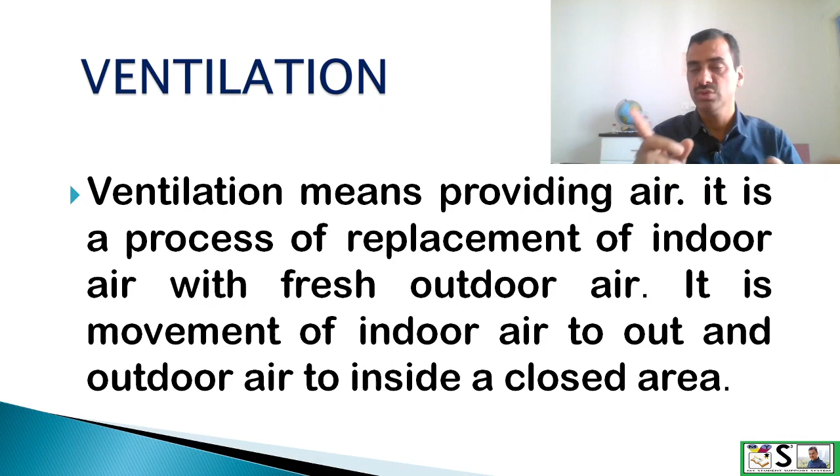What are the standards of ventilation? Normally, for ventilation standards, we use three methods. Number one, cubic space. Fresh air supply of 3000 cubic feet per person per hour is a good standard.

It is observed that if the amount of carbon dioxide due to respiration is not more than 2 parts per 10,000 parts of the air, the air of the room is considered fresh, and if it is more, then it will not be fresh and it needs to be ventilated.

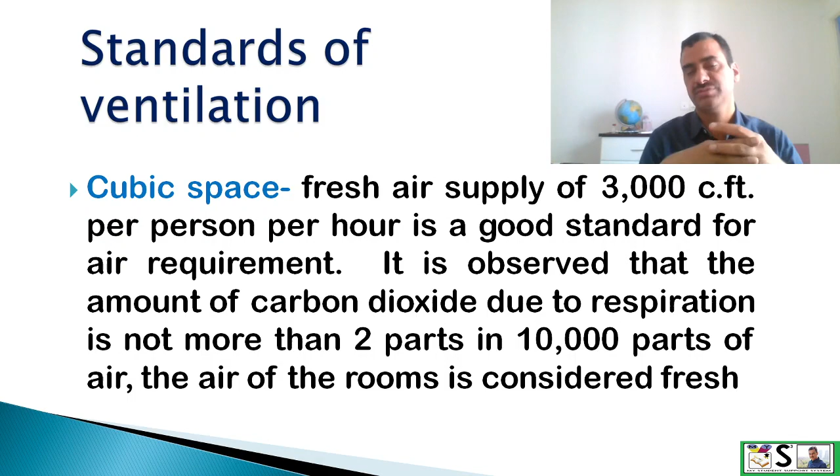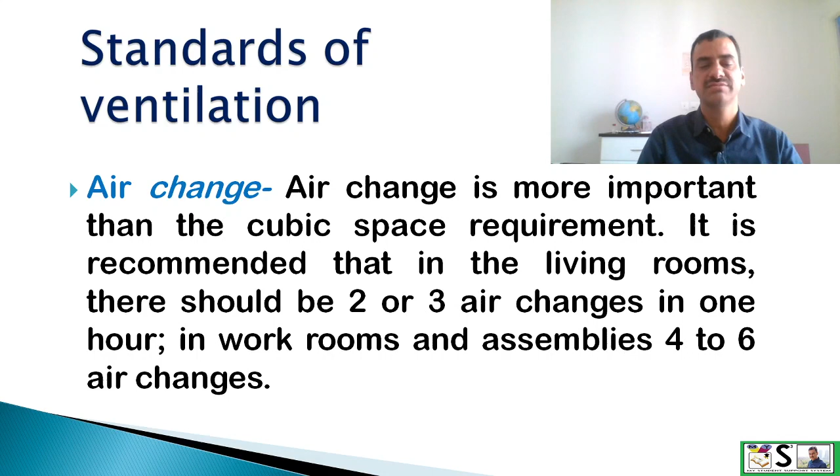Second standard is air change. Air change means to change the air. How often should the air be changed? Air change is more important than the cubic space requirement. It is recommended that in living rooms there should be 2 to 3 air changes in 1 hour. In workrooms or assemblies, 4 to 6 air changes per hour are required.

Third is floor space. Floor space per person is also a good standard and more important than the cubic space. Normally, in rooms, height over 12 feet is not considered. The optimum floor space requirement per person varies from 50 to 100 square feet.

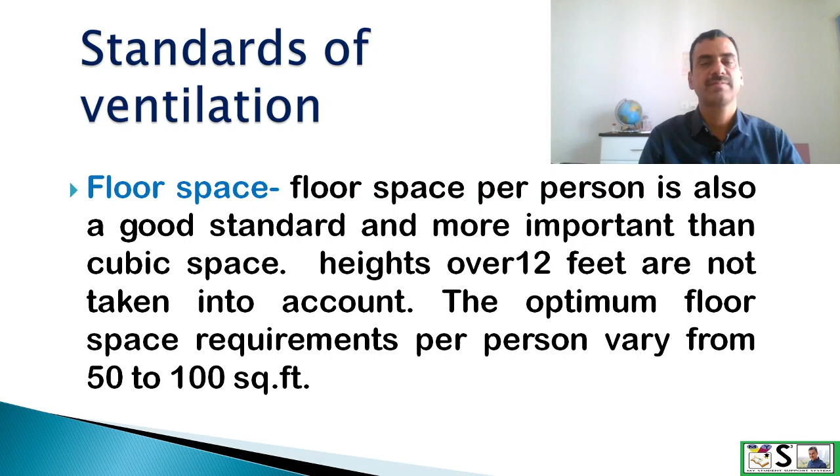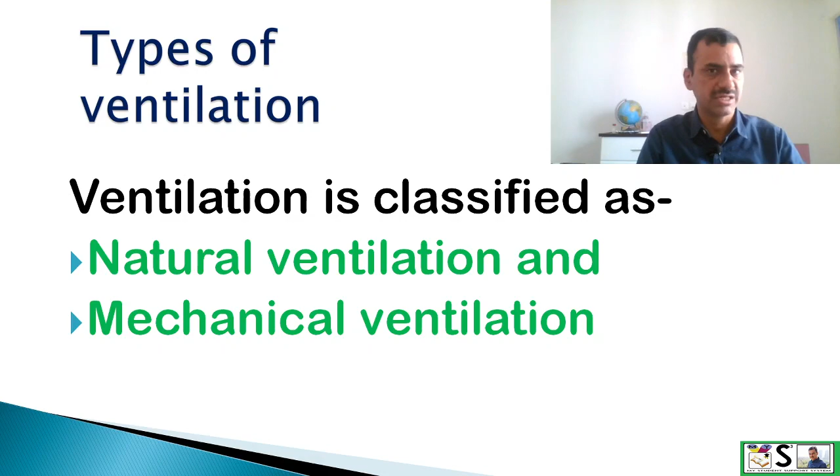Now, types of ventilation. There are two types of ventilation: natural ventilation and mechanical ventilation. Natural ventilation is the simplest system of ventilation in small houses, rooms, schools and offices. In this method, certain natural forces work for the ventilation.

There are three types of natural ventilation: wind, diffusion and temperature difference. First is wind. The wind has a natural force. When it blows or moves through the room, this process is called perflation.

Sometimes due to obstruction, it exerts a suction action at its tail. This is called aspiration. When doors and windows are facing each other, this process is called cross ventilation. It is the best system of natural ventilation.

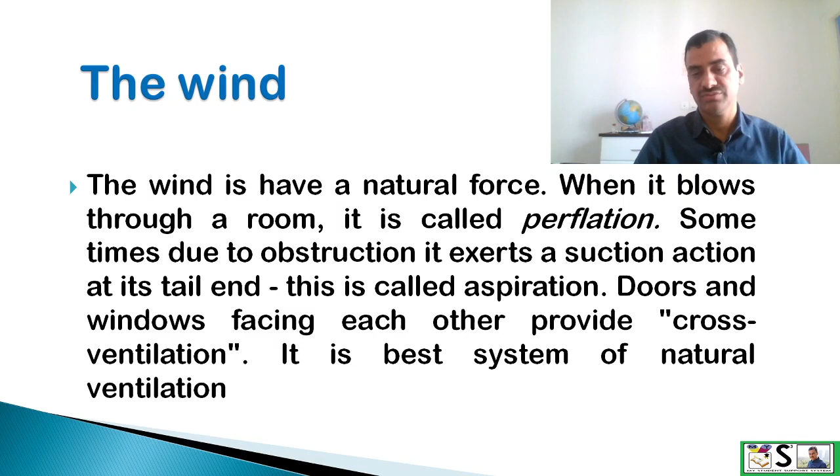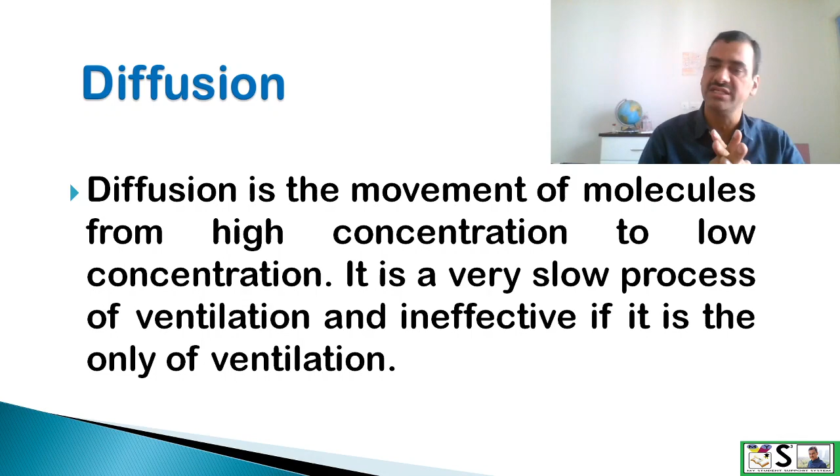Second is diffusion. Actually, diffusion is a very slow process of ventilation where the molecules of gases present in the air travel from high concentration to low concentration. And if it is the only method of ventilation in rooms or houses, then it is ineffective because it is very slow.

Third is temperature difference. Air flows from high density to low density. Hot air, which is low in density, escapes from the openings or ventilators provided in the room, and normally these are placed at a height near the roof.

The outside air, which is cooler and more dense, will enter the room through the doors and windows provided. So a natural cycle is created. This is also a good system of natural ventilation.

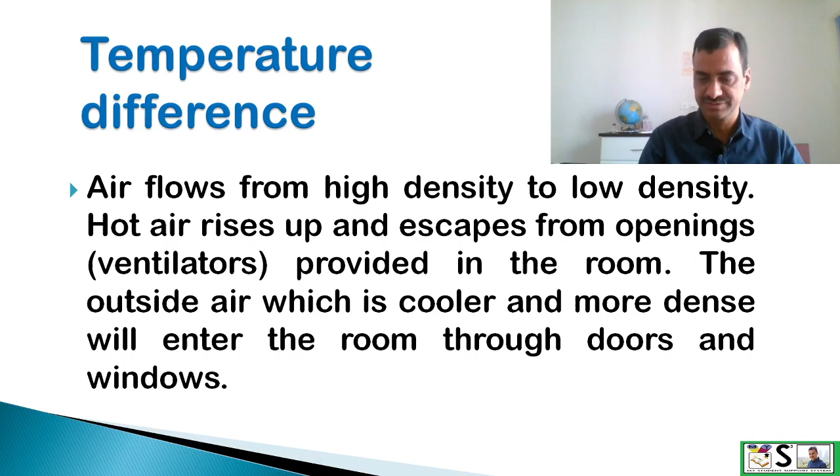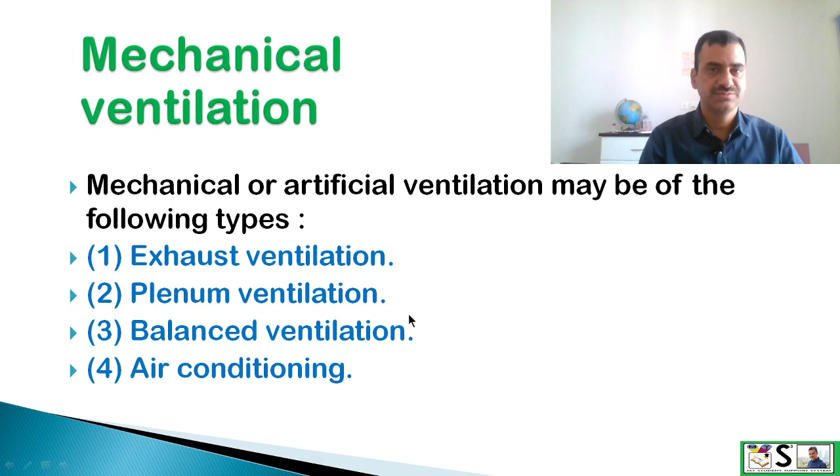Now we come to mechanical ventilation. Mechanical or artificial ventilation may be of four types: exhaust ventilation, plenum ventilation, balanced ventilation, and air conditioning.

Exhaust ventilation. In this system, air is extracted or exhausted to outside by electric exhaust fans. As the air is exhausted, a vacuum is created in the room, which results in fresh air entering the room through windows, doors, and other inlets.

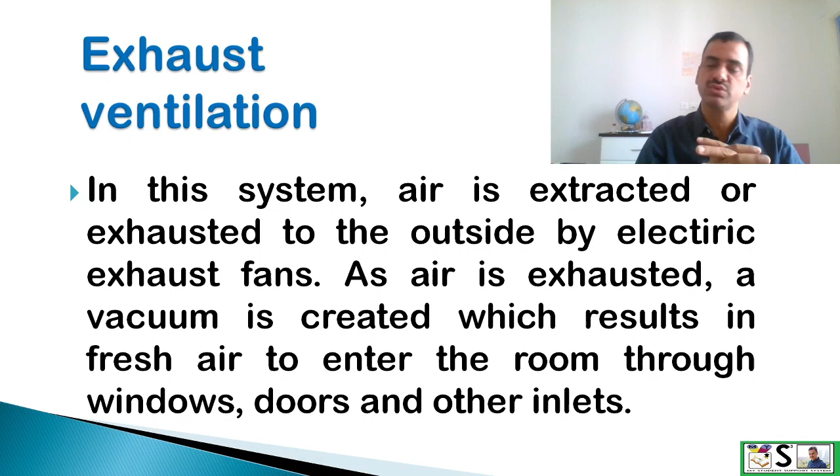This system is generally provided in large halls and auditoriums for the removal of vitiated air. The exhaust fans are fixed in the external walls, up near the roof, which facilitates removal of the upper layers of heated and light air.

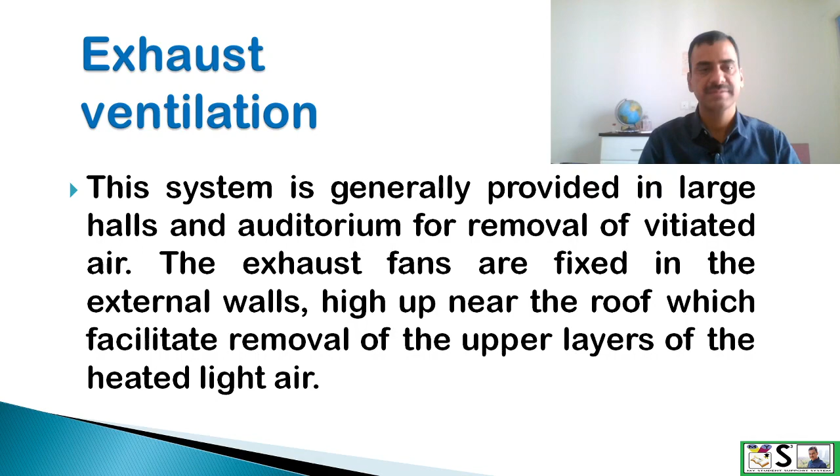Next is plenum ventilation. Plenum ventilation is opposite to the exhaust system. In this system, fresh air is blown into the room or hall by electric fans so as to create a positive pressure in the room, and due to this it displaces or removes the vitiated air through the outlets provided in the room or hall. Air is delivered through ducts at the desired points.

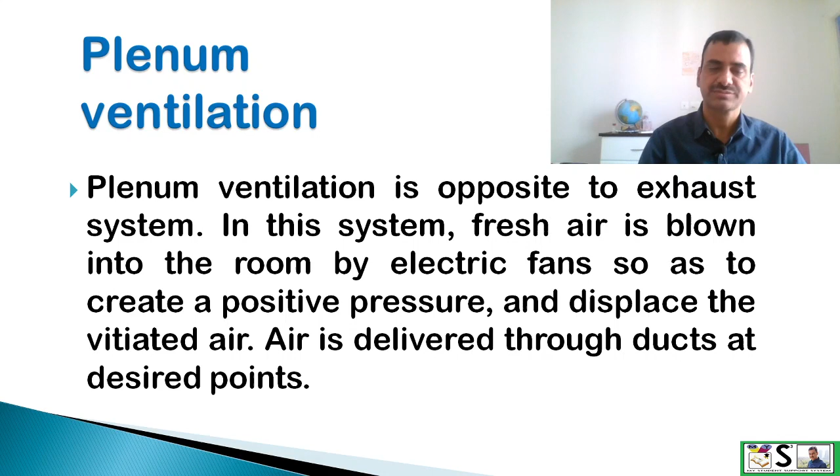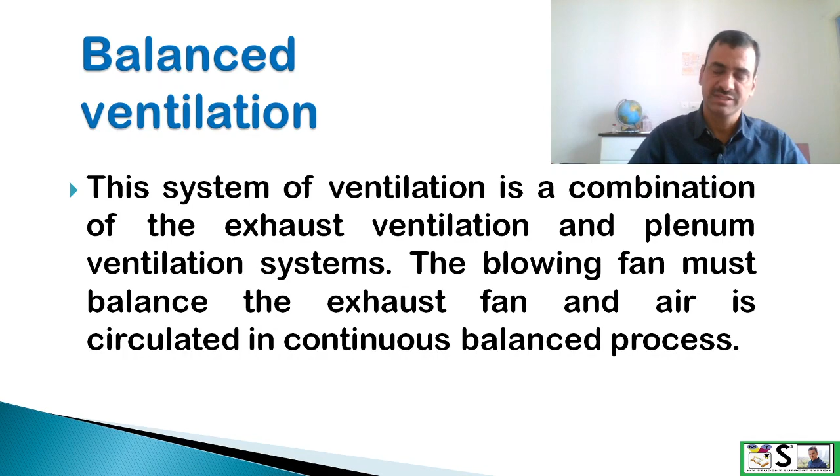Balanced ventilation. This system of ventilation is a combination of exhaust ventilation and plenum ventilation. The blowing fan must balance the exhaust fan, and air is circulated in a continuous balanced process. This is also a good ventilation system.

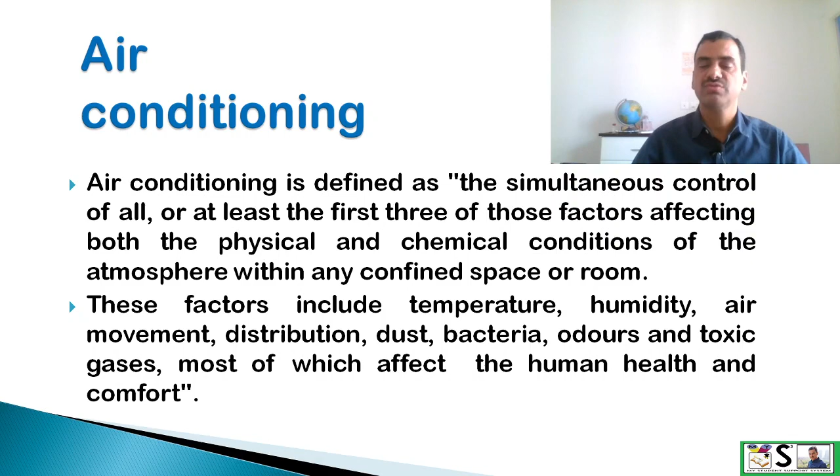And finally, there is air conditioning. Air conditioning is defined as the simultaneous control of all or at least the first three of those factors affecting the physical and chemical condition of the atmosphere within any confined space or room. These factors include temperature, humidity, air movement, distribution of the air, dust, bacteria, odor, and toxic gases, most of which affect human health and comfort.

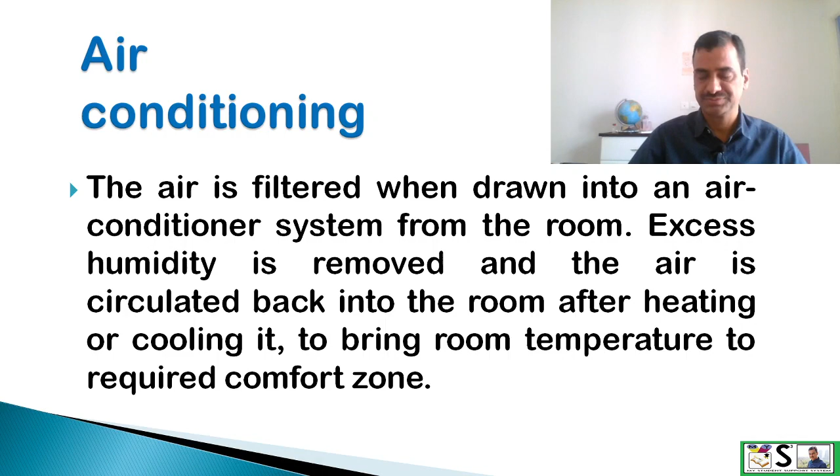The air is filtered when drawn into an air conditioning system from the room. Excess humidity is removed and air is circulated back into the room after heating or cooling as per temperature requirement to bring the room temperature to the comfort zone. So this is all about air conditioning.